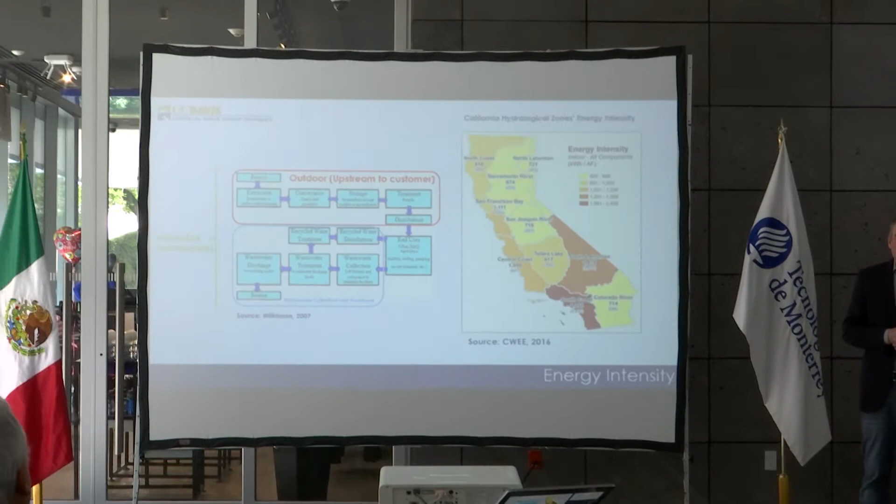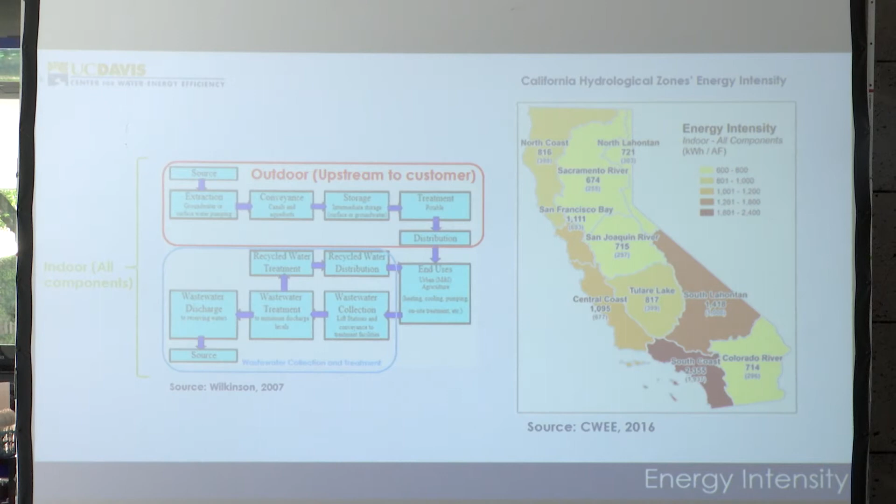So if at any point you have questions, feel free to raise your hand or just yell out. So I'm going to step through 4 projects today. It's more of an overview than diving deep into one project. So the first project I'd like to talk about is one we've been involved with for several years, looking at quantifying the amount of energy that's embedded within water. Once you understand that, you can begin to understand the energy savings through water conservation. So I'm going to develop that concept in the next few slides.

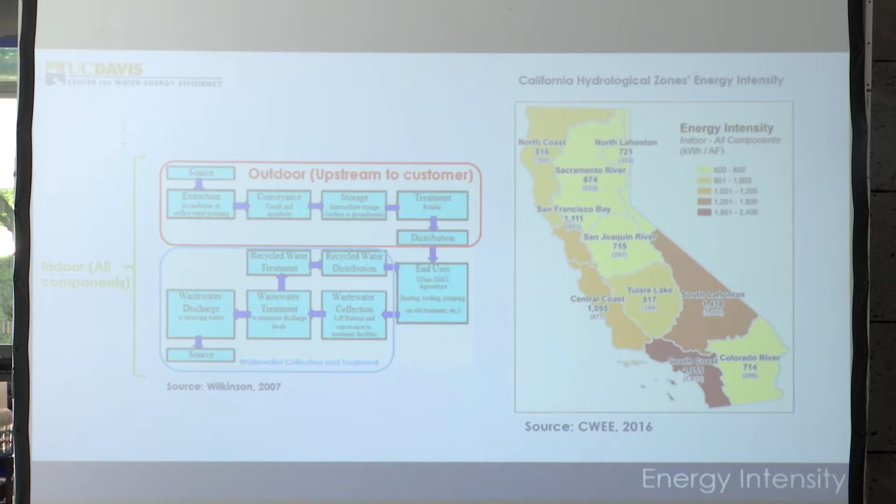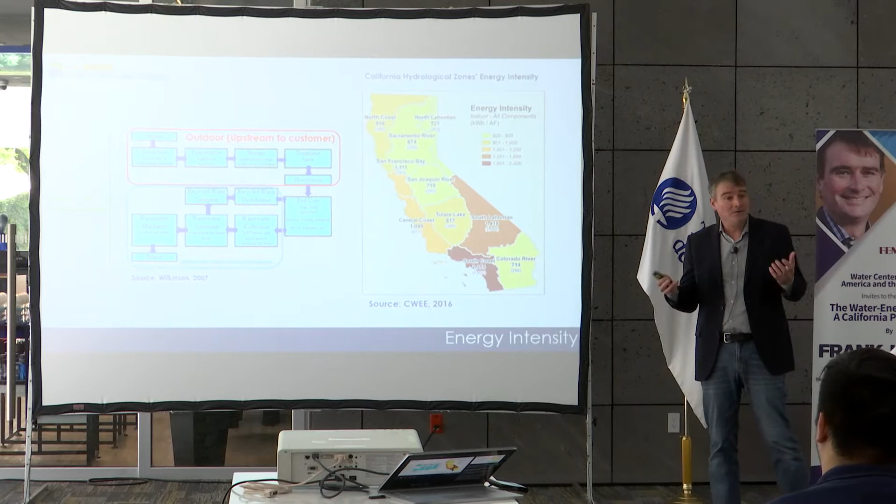Shown here on the left-hand panel are boxes representing the different elements associated with providing potable water or drinking water to an end user, like a house, apartment, or industry. The boxes shown going this way are the different elements associated with treating wastewater before it's discharged into the environment. Each one of these boxes has energy used as part of that process. If you add up all the energy in these boxes to represent the amount of energy embedded or associated with the water provided to the end user, you can begin to understand that if the end user saves water, they also save electricity or natural gas, and you can quantify how much they save.

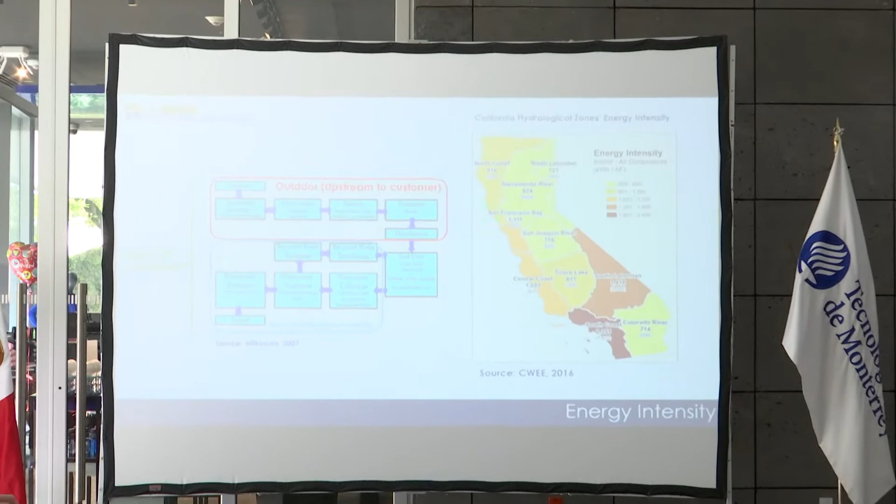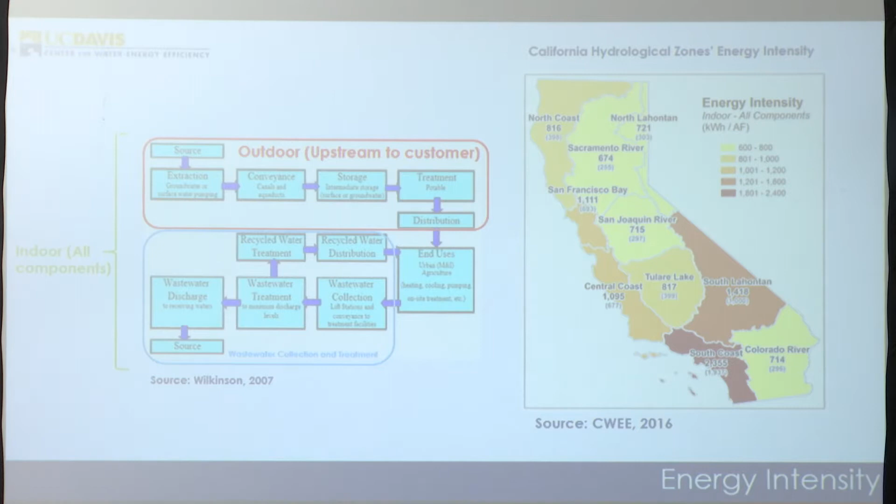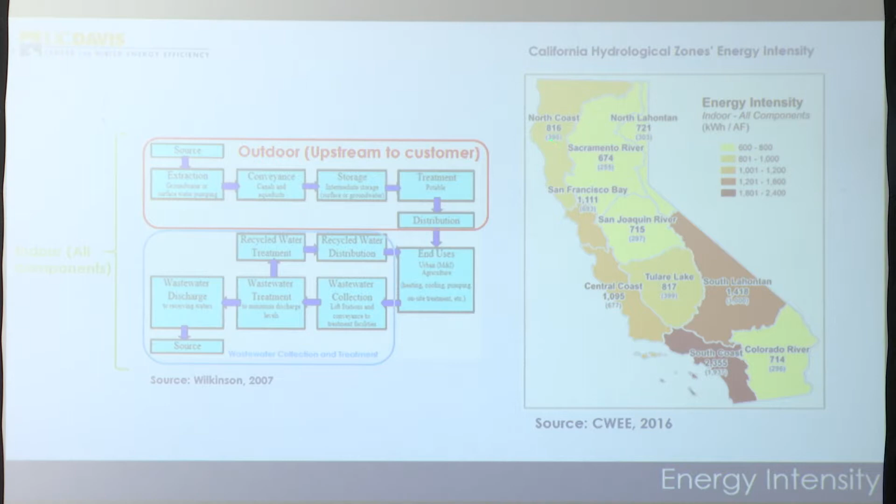There are two primary ways to calculate energy intensity, so I'm going to show you two ways now. The first way is, this is the state of California, and the first approach is to develop regional estimates. This right here is a region within California called the North Coast region. Someone went through about 5 years ago, and developed the energy intensity of that water. The value shown here in bold is the sum of the energy put in to make drinking water plus the energy put in to treat wastewater. The parenthetical value down here is the energy used just to make drinking water or potable water. So that's one way, and it's a static value.

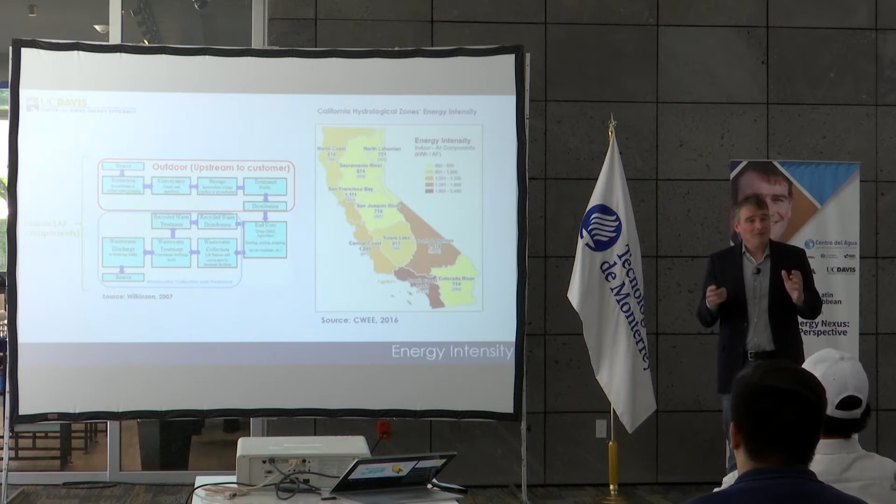It doesn't change with time, it's just a value. Then if you live within this particular region, in concept, if you roll out a program that replaces toilets and shower heads, you could figure out how much energy you save through saving water by replacing those fixtures within a house or residence.

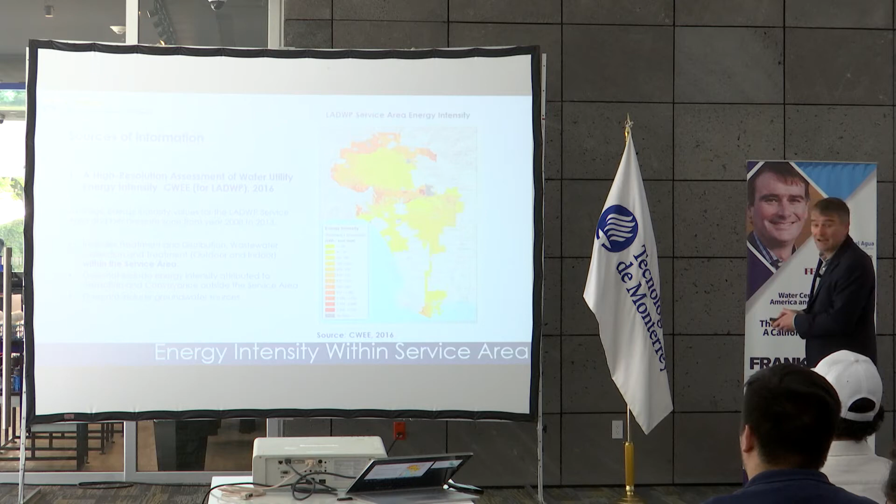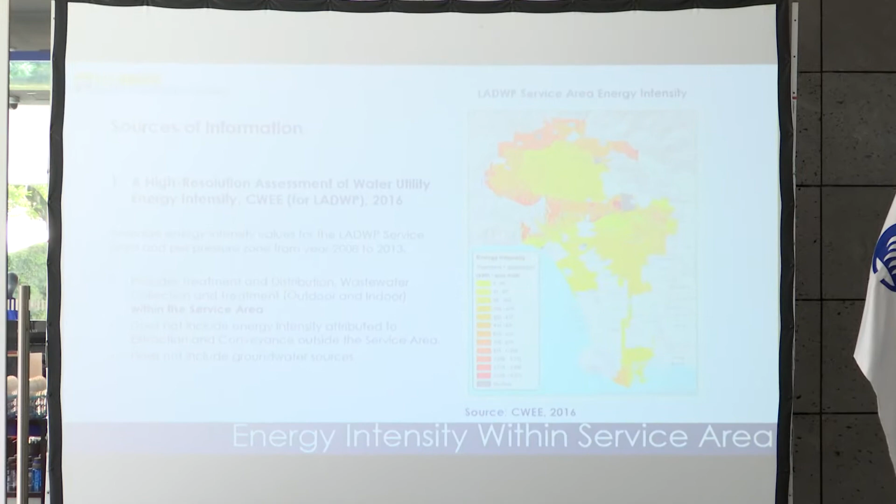Throughout these slides, don't worry too much about the text. I'm just going to say what the text says in words, so focus more on the images. The other way to do this is by going to the water utility itself or the wastewater utility and obtaining actual information from them.

Yellow is low and red is high. The takeaway message here is that within a water utility, there are certain areas that use a lot of electricity or natural gas, and areas that use very little to none. This is a much more accurate number than the regional estimates, and it can also change with time. You can update the numbers monthly, yearly, on whatever basis you'd like.

We also did a similar study with the wastewater system, which I'm not going to show you, but it produced a similar kind of graphic representing the energy associated with wastewater conveyance, treatment, and disposal.

The other element, so that's all within the utility. It'd be like the city of Monterrey, that would be all the energy within the city. There's also energy expended to get the water into the city, and this is generally associated with surface water. If you have to transport water long distances into your city, there's energy associated with that.

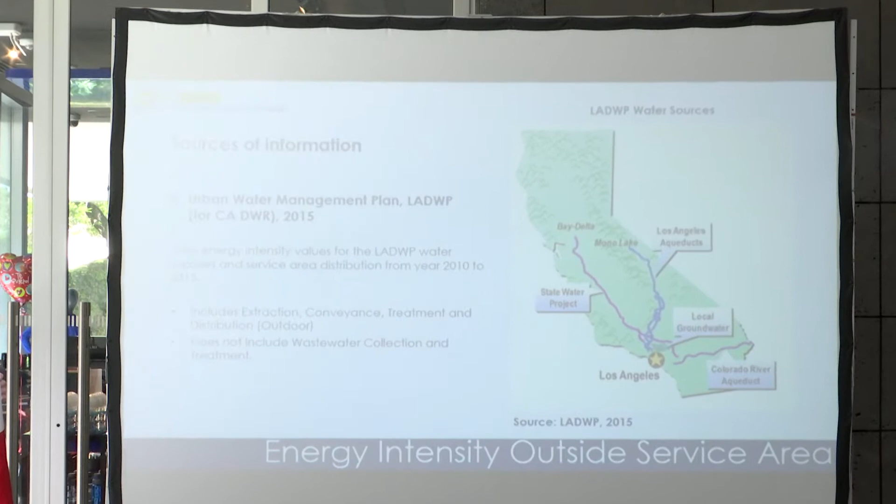Los Angeles also has some groundwater pumps that they pump locally, but they also get their water from three different sources: the State Water Project, the Los Angeles Aqueduct, and the Colorado River. We also incorporated the energy from these outside sources into our estimates of the energy intensity of the water system itself, which I just showed you in the previous slide.

What we did next, again, don't focus on the words, I'll describe this, just focus on the graphic. We now have basically six different estimates of energy intensity. This value is the energy intensity within the service territory of just their drinking water system. Here, the red is wastewater, the blue is water, same as before. This value is the energy intensity associated with just their service territory for both water and wastewater.

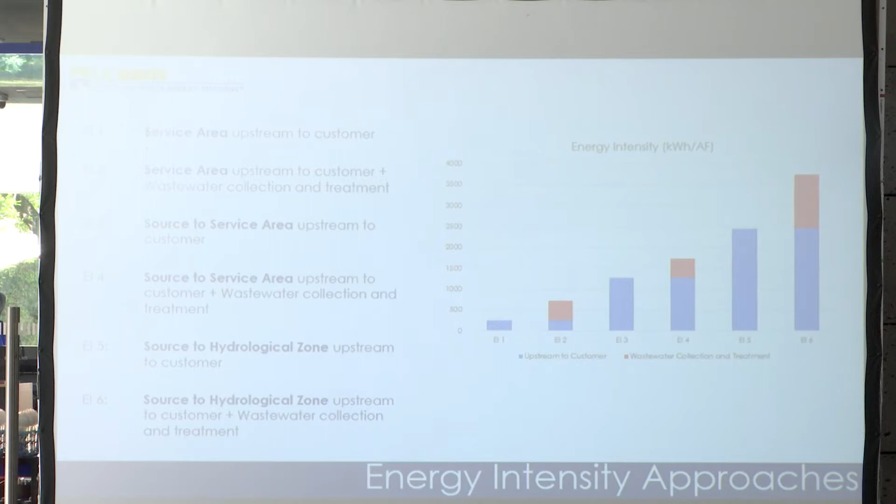This value here is the energy intensity of their potable water system, including the energy in their water utility, and then at a larger geographic scale, the energy expended to get water into their service territory. Same idea here for water and wastewater, and then these are the regional estimates that I showed you in the first slide.

What we did is we took these different numbers and used them to estimate the energy saved through the different water conservation programs that the Los Angeles Department of Water and Power has in place, and we compared them to their energy efficiency programs run from their energy group.

Shown in blue, these words here, again, the words themselves are not important. What's important to note is that the words corresponding to the blue bars are different types of water conservation programs that the Los Angeles Department of Water and Power has put into place over the years. As an example, this says high efficiency washers, this says high efficiency toilets.

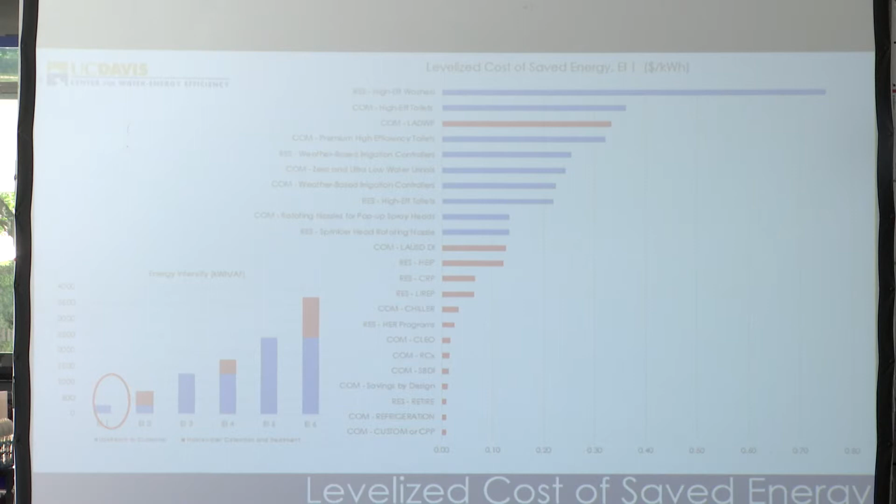All the words corresponding to the red bars are energy efficiency programs they put into place to save energy. Those programs include things like replacing incandescent light bulbs with LED light bulbs, or replacing low efficiency water heaters with high efficiency water heaters. They're programs that specifically targeted technologies that save energy, not water.

What we've done here is used the energy intensity estimates to translate the water saved through these different programs into the corresponding energy that was saved through saving water. All these bars are in reference to dollars per kilowatt hour. We're going to do this now six times, and as this happens, all these names will stay the same, but the bars will change.

So the first estimate of energy intensity we're using is just the energy intensity of the potable water system within Los Angeles Department of Water and Power service territory. And you end up with a plot like this.

So the cost to save a kilowatt hour through water programs is not very competitive to the cost associated with saving energy through energy efficiency programs. Compare the blue bars to the red bars - they're larger. So from a business standpoint, if you look at it just through this lens, it makes a lot more sense to spend energy efficiency money on energy efficiency programs, not water efficiency programs.

But now as you expand your lens and look at the second way to calculate energy intensity, the blue bars get smaller. I'll just click through this and you can watch it like an old-time movie. But as we expand the geographic scale, the blue bars shrink. And so as you expand the geographic scale, at some point investing energy efficiency money into the water sector to save water becomes a very cost-effective way of saving electricity.

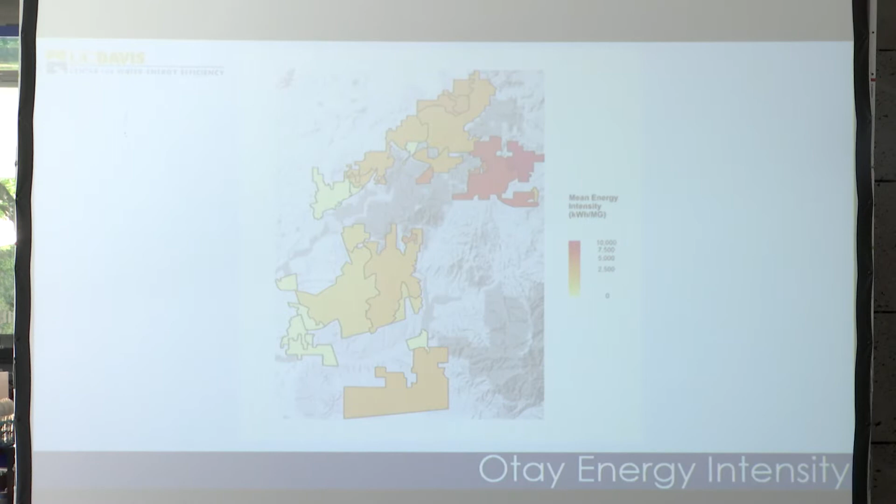Now these colors correspond to the energy intensity for different regions within the city of Otay. It's a very similar graphic to the one I showed you for Los Angeles Department of Water and Power. The city of Otay was interested in rolling out a rebate program, which I'll talk about in a second.

So the idea here is: historically, if Otay wanted to roll out a water conservation program, they would pay the full amount for it. But the idea we're trying to develop is that there are multiple stakeholders - 3 energy utilities and 4 water utilities - all of whom benefit from saving water down in Otay.

But there is a way to estimate this fairly accurately. This is an equation we developed, it's existed for a while, it's called the efficiency lift method. You can estimate the amount of water withdrawn from the ground with four inputs: the energy use of the pump, the efficiency of the pump, a conversion factor, and the total dynamic head associated with the pump.

This is the same equation, it just breaks down total dynamic head into its components: the depth from the ground surface to groundwater, the drawdown of the well—once the well starts to pump, it tends to create a cone of depression—and any additional pressure or frictional losses as the water leaves the ground and goes through the pipes out to where it ultimately gets deposited.

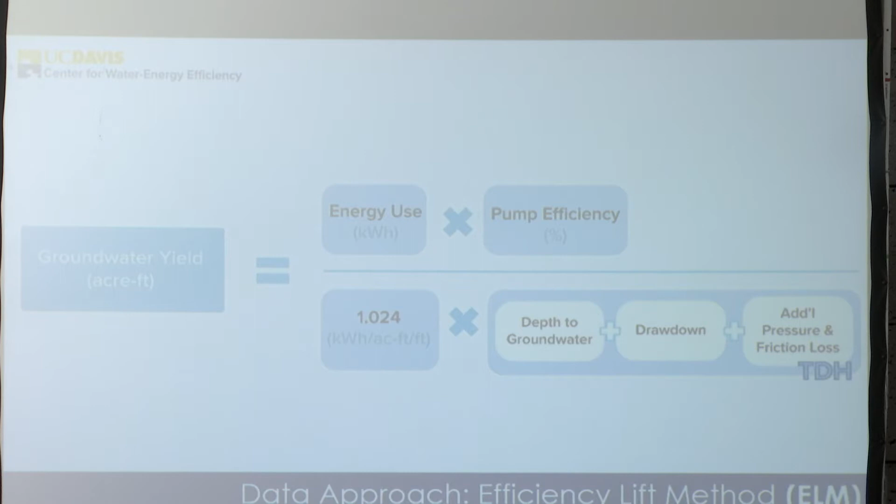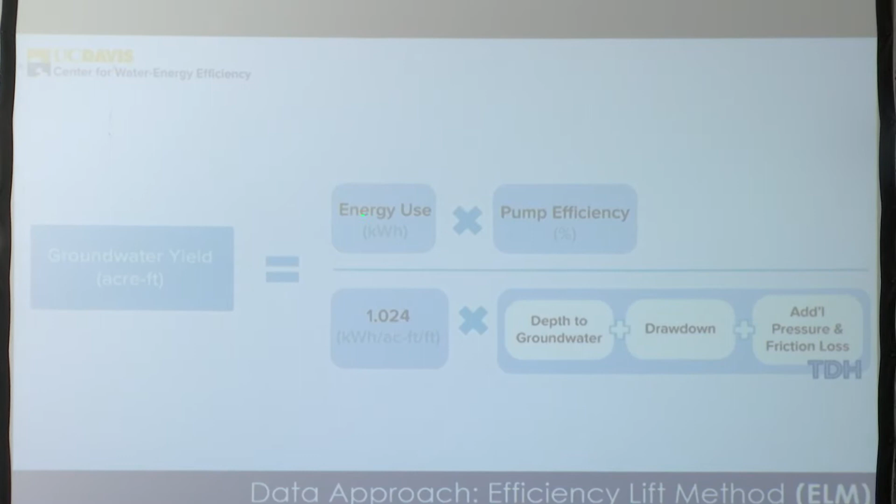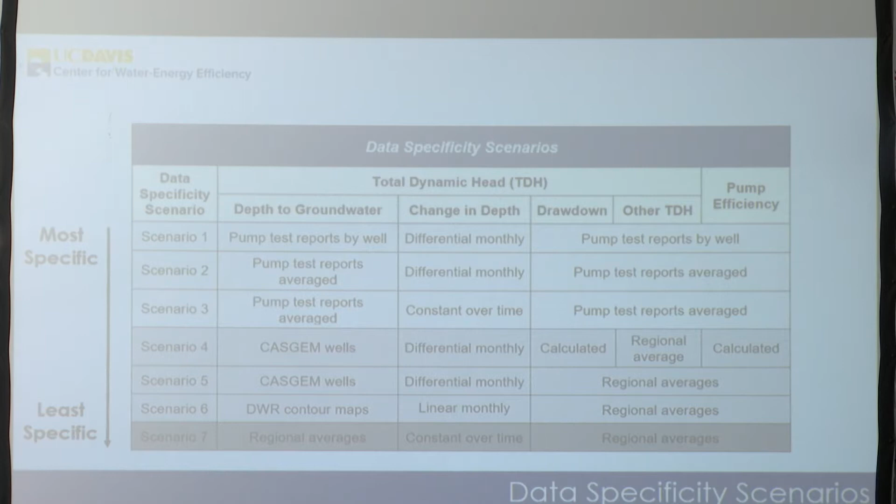This was a very long and detailed study, but we used this method with a variety of data sources to obtain these numbers. We ran a series of 7 scenarios, and these are all the sources of data we used. We had a lot of different sources and we mixed and matched them to create 7 scenarios.

We worked in a region in California where they had flow meters on the agricultural pumps, which is very uncommon. So we had an actual estimate of water flow, and then a predicted estimate using electricity data and the efficiency lift method. We wanted to compare the two to see how accurate they were.

We compared them on two bases. One was looking at how accurate they were on a monthly basis—monthly estimates of all the inputs that go into the efficiency lift method versus the estimate of water flow. How closely did those compare?

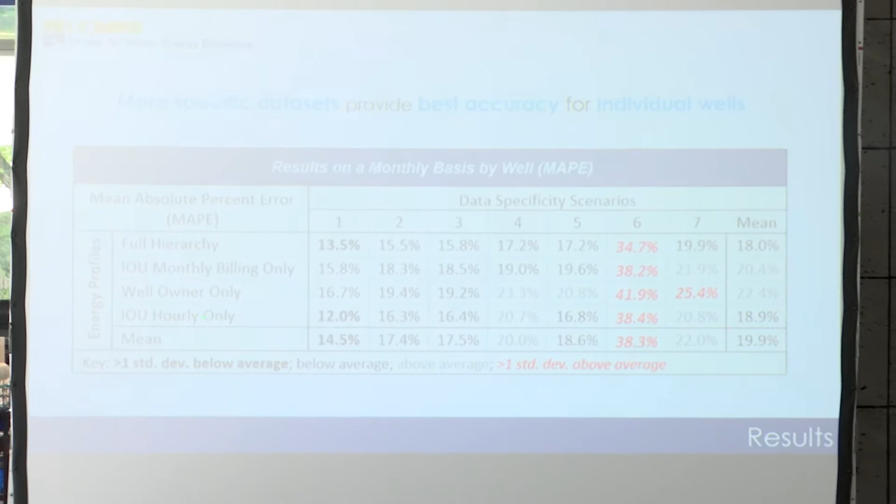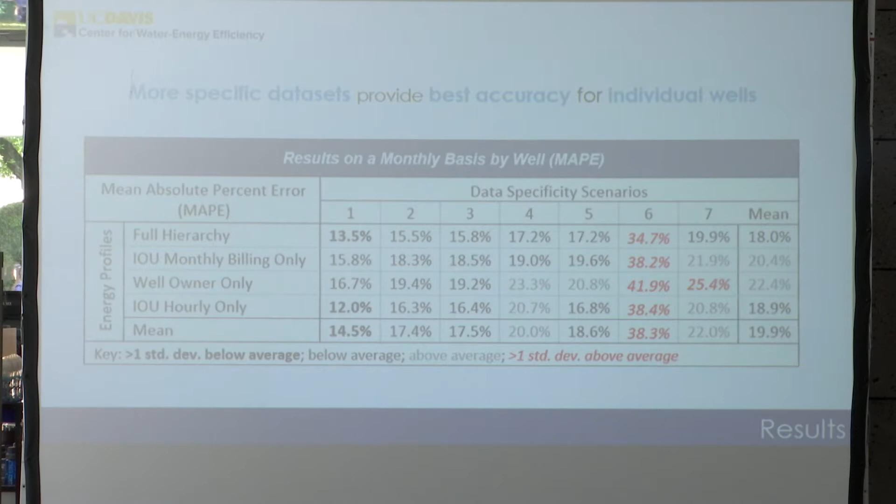There's a lot of information here, but the main thing to focus on is this IOU hourly data. This energy data came from the energy utility itself. We have the ability in California, through different laws and policies, where people like me can go and request energy bills from the utility without the customer's permission. There are a lot of restrictions placed on me in terms of what I can do with that. So we obtained the energy bills from the energy provider, put in the estimates of the other parameters, and calculated how well this method compares.

You can see there's quite a range here. This one is the best, at 12%. And 12% might sound like a lot, but when your basis of comparison is no data versus data that gets you within 12%, that's not a bad estimate.

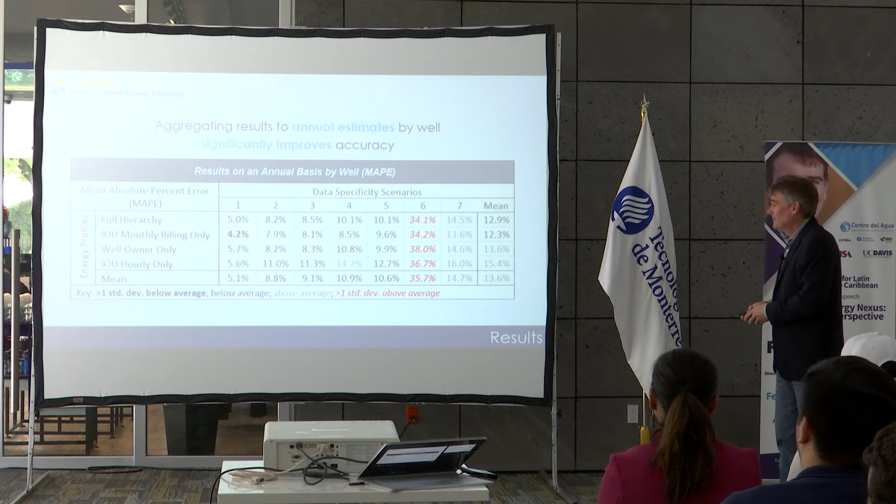Then we looked at it another way: take all these numbers and average them together into an annual average. We looked at the data the same way—again, just focus on this one. As you look across here, the errors associated with this method versus the actual data begin to lessen, because you're averaging a lot of the errors together associated with the two methods.

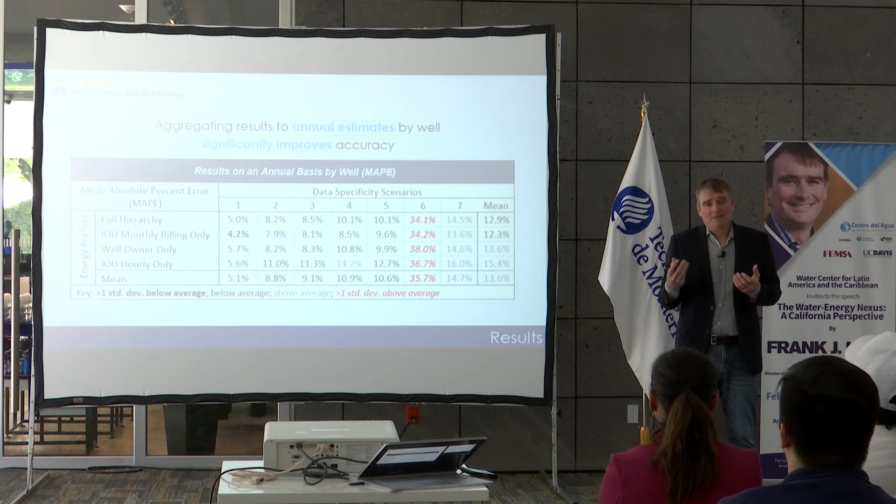A method that estimates groundwater extraction within 5% is a very good method. So we're now planning to use this method to integrate into groundwater models in California, to begin making estimates of how much groundwater is withdrawn. Through that process, we'll begin land use planning of what needs to happen on top of the aquifer to ensure it's not overdrafted over a long period of time.

Land use planning means you can have agriculture, industry, or commercial, but what mix of those should you have over that aquifer to ensure the aquifer will be present in your children's lifetime. This is another concept we'd like to explore and bring down to Mexico in the Monterrey area.

Remember the four areas I wanted to highlight. The third area is opportunities for water and energy efficiency in agriculture. There's quite a diversity of water and energy use efficiency in California, and from what I gather, quite a diversity down in Mexico as well.

The basic idea is if you can obtain actionable intelligence on what different growers or farmers are doing, you can help the ones that are not very efficient become more efficient, and the ones that are very efficient you can help promote and advertise as being really good stewards of the environment.

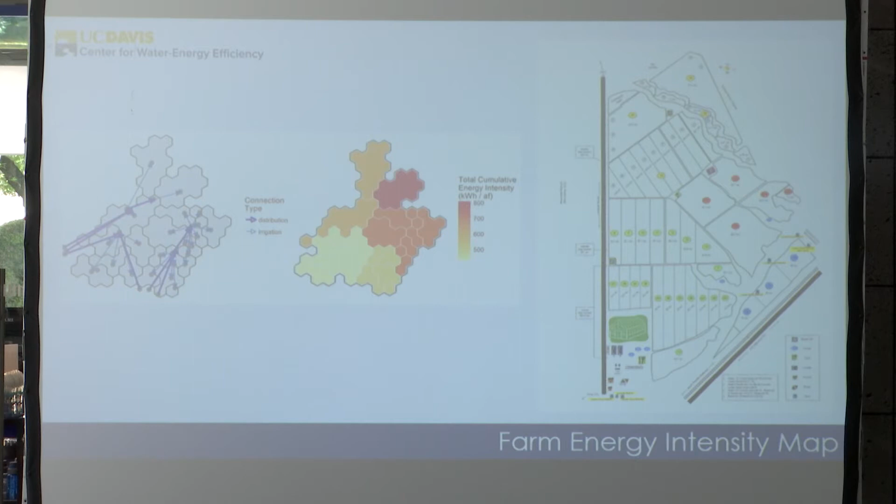Shown here is a graphical representation: berry grower, berry grower, berry grower, berry grower, and berry grower—so there's 5 berry growers. These numbers represent low energy intensity.

Energy intensity is how much energy is used to produce an acre foot or a certain volume of water. Yellow's low, red's high. If you compare these 5, you can see there's diversity across different berry growers, and that diversity of energy use might be warranted, but it might not be.

So this at least gives you a tool to go in and say, well, this berry grower and this berry grower might need some help to make their pumps more efficient or to make their operations more energy efficient. The idea is you can identify those growers, understand what they're doing, and then if they need help, formulate plans for what they need to do to make their growing operations more energy efficient.

Shown here is row crop and row crop—there's 2 row crops, but again you can see some diversity in how energy is used within row cropping or irrigation of row crops. And then we have 2 wineries down here, and again there's quite a bit of variation there.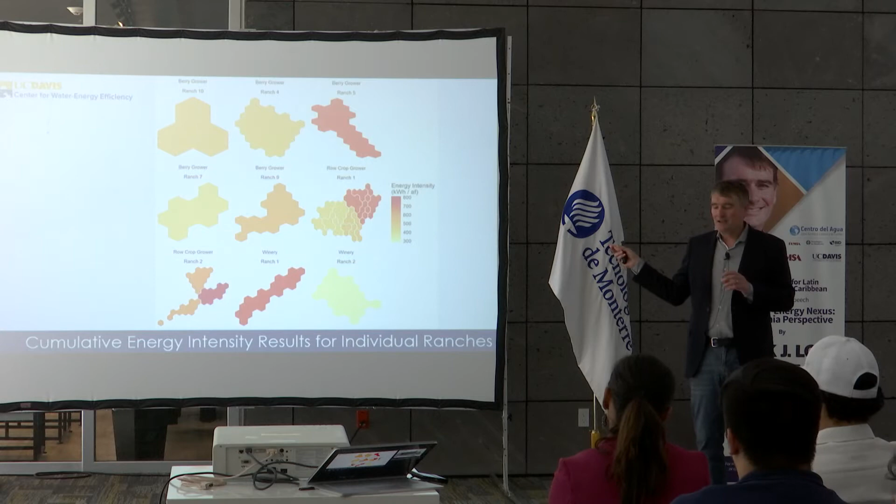I don't have a slide just for the sake of time, but remember that energy is linked to water, so we could translate this very easily into water use. We'd end up with the same types of plots, and we can use that to interact with growers and farmers to understand how they're using water and what practices they might adopt to make their water use more efficient.

That's another project we're working on, and we hope to bring that down here, ideally marrying it with the groundwater modeling piece. So now that you can estimate how much water is withdrawn from the ground, you can get a sense of what's taking place on the land. You can then go in and help people become better stewards of water and energy who need help, and promote the ones doing well as good examples for others to follow.

The final piece to end with—and this is a little longer, but I thought it might be more interesting for all of you as college students—is the final project we've been working on related to this area: trying to take these concepts I've described and downscale them to a residential house.

Some people like to use the words on-site or decentralized, but it's like, can we take these concepts that we apply to communities or regions, and extend them down to a much smaller scale—basically the scale at which you and I live?

This project was actually a 2-year project, a student competition sponsored by the U.S. Department of Energy called the Solar Decathlon. In the Solar Decathlon, I have a series of slides to show you, but students design, build, and then operate a zero net energy residential house, going through all the steps of doing that.

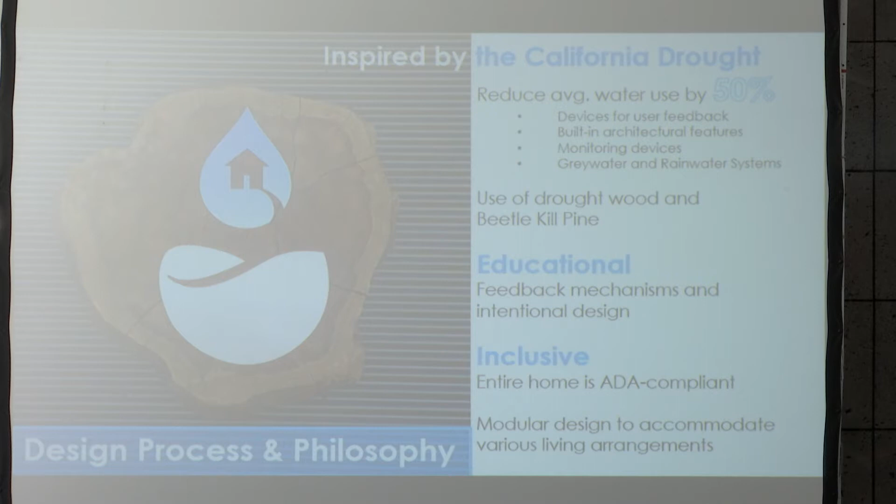In addition to the competition goal of designing a zero net energy house, students could also decide on other elements they wanted to add. This student team was very interested in designing a house that had very little water use. Their goal was to reduce the water use of this house by half of what a normal house in California would use. I'll talk about how they did that here in a minute.

They also were very interested in having the house be educational, so that as you tour the house, or as you live in it, it will teach you something about what you're doing and how to become better at it. I gave you an example of farmers and how we can identify growers that have high energy or water use. They wanted to take this idea and bring it into the house, having it teach the occupants how to be better stewards of energy and water. I'll show you some ways they did that.

The final thing is they wanted the house to be inclusive, and they defined that in two ways. They wanted it to be ADA compliant—ADA standing for the Americans with Disabilities Act—so they wanted it accessible to people with disabilities. They also wanted the house to be modular. I'll show you pictures here in a minute, but the idea of modular is the house was small, about 930 square feet, and they wanted it to be modular so you could reprogram it—your kitchen can turn into a dance room, or your living room can turn into a dining room. So while it's a small house, it can have the functionality of a much bigger house. They weren't able to fit a bowling alley into it, but they got a lot of other functionality into the house.

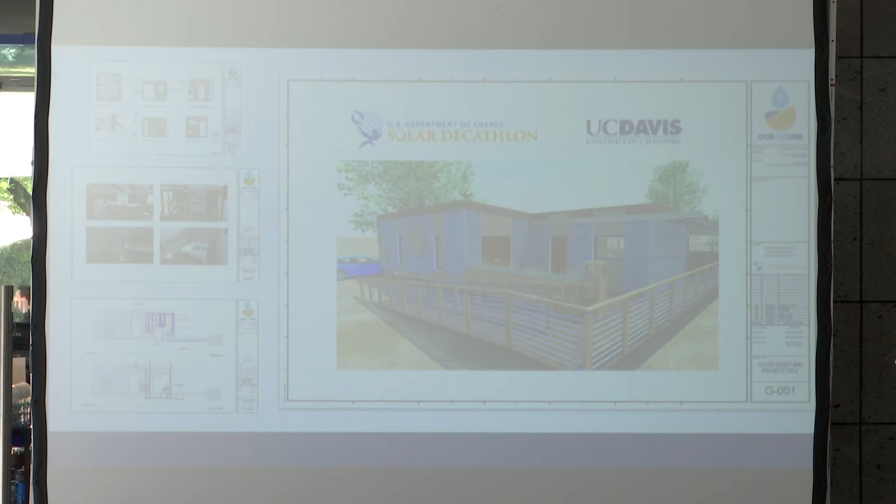The students took the house from conceptual design to design development, and then ultimately worked out detailed design, producing a set of plans and specifications that, in concept, you could hand off to a contractor to build. But instead of handing it off to a contractor, the students moved from the classroom out into the field and began the construction process.

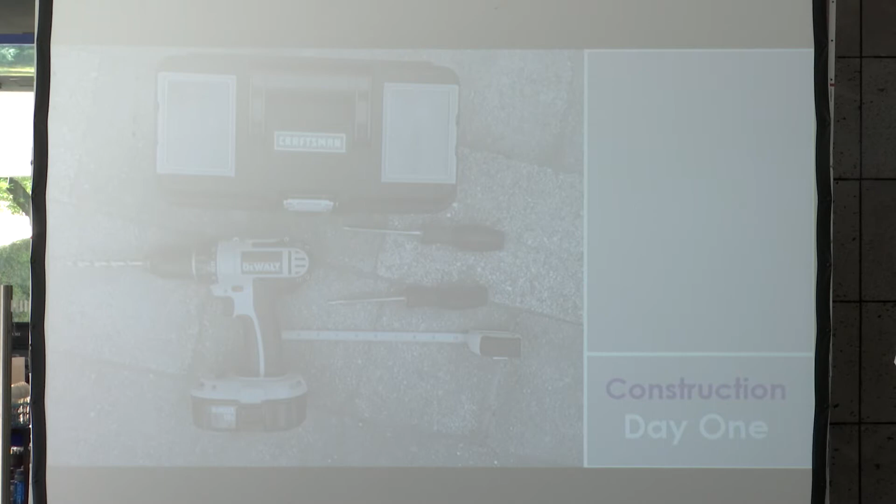I don't want to speak for all of you, but I will speak for the students that participated on this project: when you move into the field and say, okay, here's a hammer, a drill, and a tape measure, the vast majority of students would ask questions like, how do you read a tape measure? How do you use a drill? It's actually—and I don't say that to be critical of them—part of the educational process that you never think about in the classroom.

I'm assuming most of you are in some kind of design profession. You all learn how to design, but many of you don't—or at least, speaking from my university—we don't teach students how to actually build the thing they design. And I contend you have to understand how to build in order to be a better designer. We don't have this built into our curriculum, so this was the only opportunity students had to learn these skills.

So I just have some photos of the construction process happening. The house, because it had to be transported, was built on two very large trailers. I want to emphasize they're not modular or mobile homes. They were actual houses built to housing standards. The intent is, once they ended up in their final resting place, they would be slid off the trailers and put on a fixed foundation. But here you're going to see them on trailers.

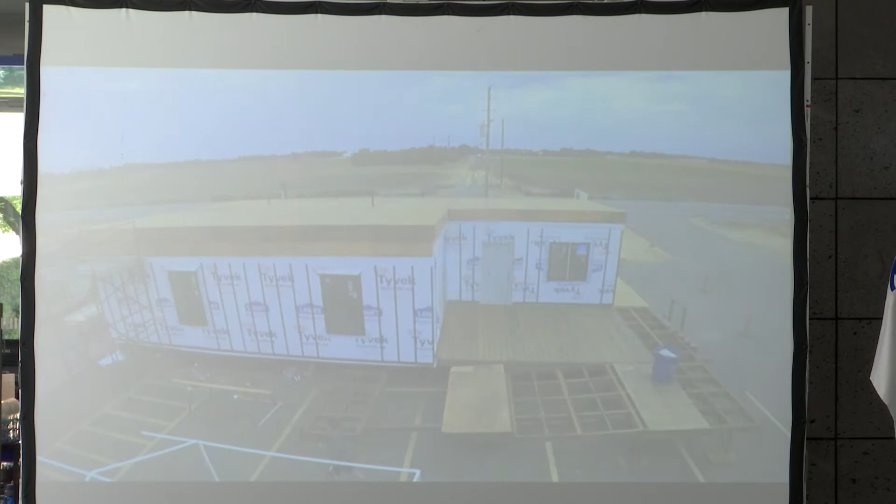So now this construction process took about a year and involved about 150 students, not all of whom are working at once, but they would come and go. This was all offered as part of a 3-course sequence teaching students how to build something.

So you'll notice now that solar panels are up on the top of the roof. There's a white roof that's part of the energy efficiency measures that were put into the house. White roofs help reflect the heat so it doesn't go into the house. There's a couple other energy efficiency measures I'll talk about.

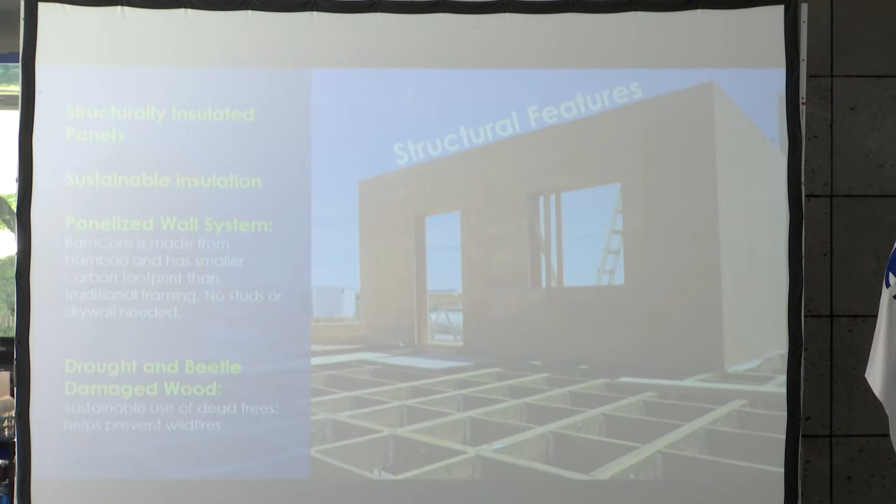Are there any structural engineers in the room? No? Okay. You have one? Maybe? So just to run through some of the features.

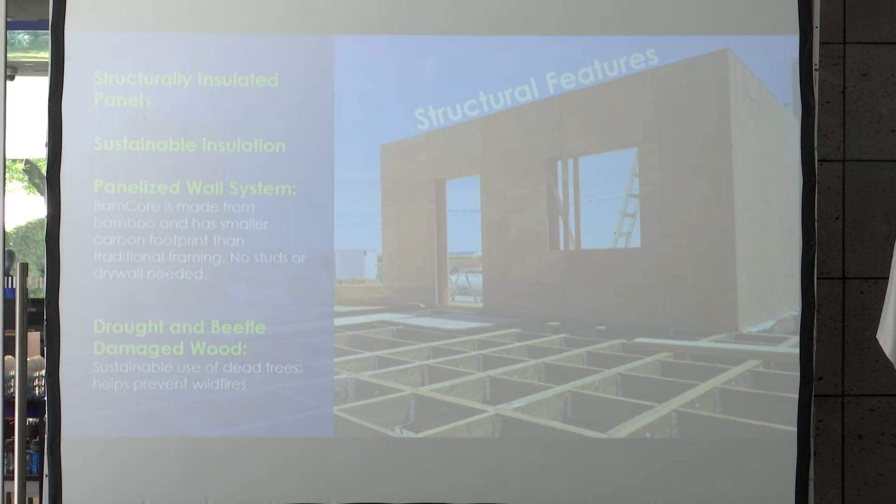So the structural elements, I think the main point here is these are panels. The students didn't build these. They're panels that you erect—built somewhere else and then you put them up. It's a very easy process for unskilled labor to use in order to build something, because you basically just erect things and put them together.

This is made out of bamboo, which in California is considered a sustainable material. You'll notice a big gap between the walls—this is the exterior and this is the interior. That gap at some point was filled with insulation that has a very high R value, so it doesn't allow a lot of heat to leave the house.

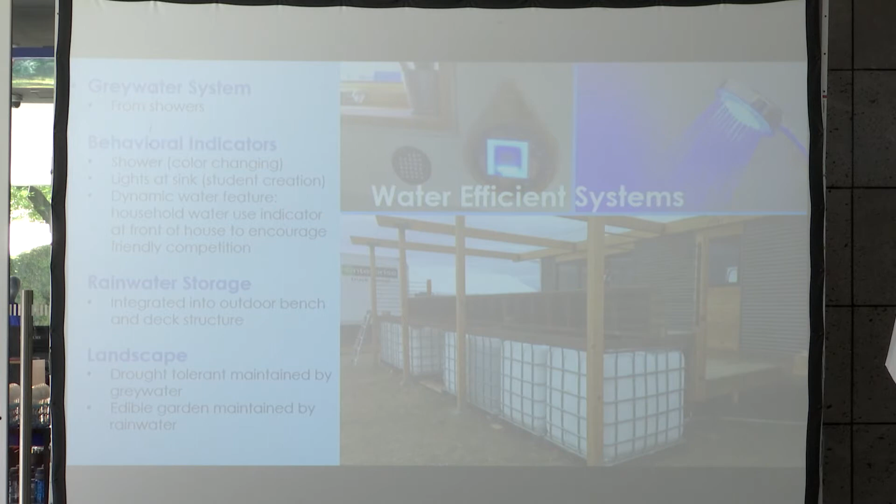One of the neatest things I thought they came up with was this idea of being educational. They had behavioral indicators that taught the residents of the house whether or not they're using appropriate amounts of water. So they found a shower head—it doesn't make the water blue, but it makes the water look blue with light. The water goes from blue to yellow to red, and when it gets to red, it means it's time for you to get out of the shower.

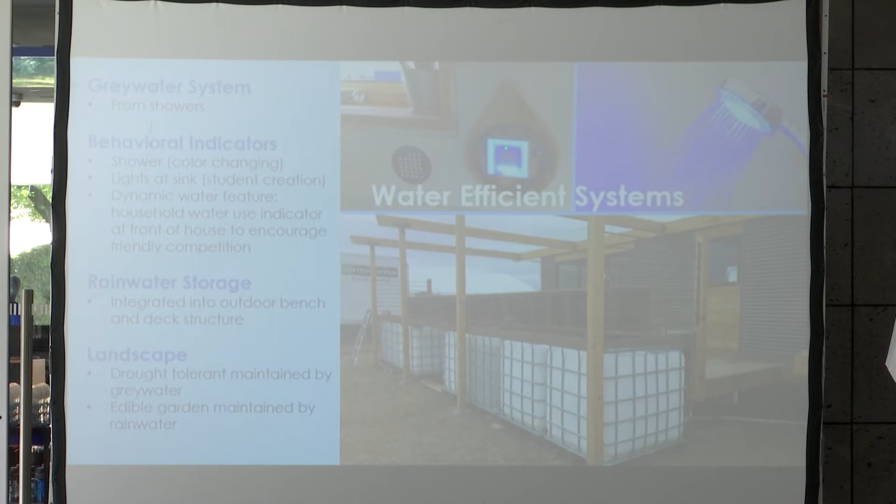They also created, and actually built this themselves, a display made of a series of LED lights—here's a few lit up. Every day when you start your day, you come out, and these lights were where there was a faucet, one in the bathroom and one in the kitchen. Every day when you start your day, the screen is full of lights, and that's your water budget for that sink—the amount of water you can use. As you start using water, the lights go away, and when all the lights go away, the budget for that sink is done for the day. It doesn't mean the water shuts off—it's just teaching you the appropriate way to use water within the house. They had a couple other educational features, but those are two I wanted to highlight.

And then finally, I thought this was really neat too, this idea of landscape and what they did. This brought in people from landscape architecture, but they landscaped the entire house with plants that used the same amount of water annually as what was produced with gray water. So they essentially eliminated the need to irrigate your outdoor landscape with potable water, but you could still have a very nice, lush landscape. Your yard doesn't look like cactus and rocks, but effectively you don't have to use any potable water to irrigate it. So it eliminates all outdoor landscaping water.

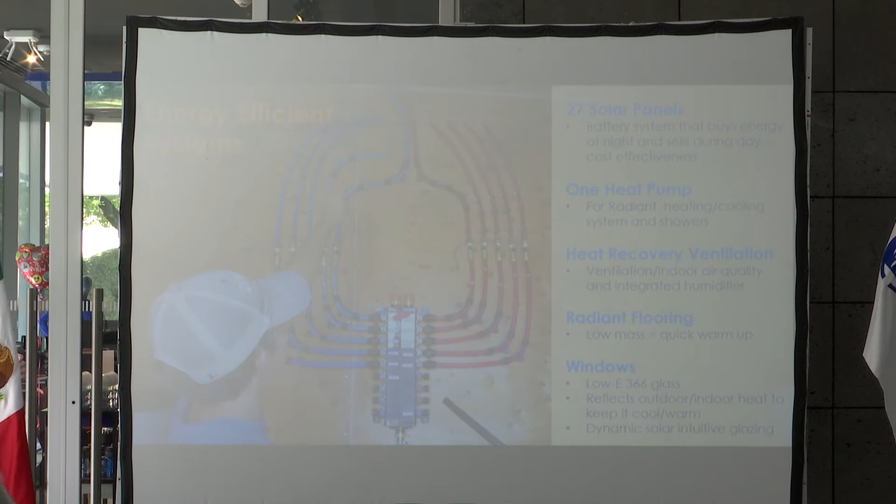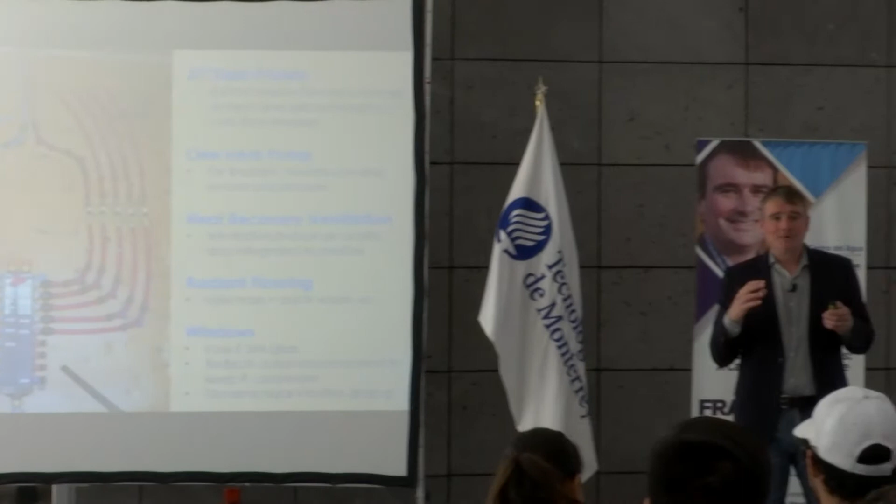Energy efficiency, I'll run through this quick. The house had 27 solar panels which generated enough electricity to power the house. We put in a battery so that not only could we generate electricity, but we could manage when we pulled electricity from the grid versus the battery, managing the time of use. So it was grid tied, and it's zero net energy, meaning over the course of a year it uses zero energy, but sometimes it pulls from the grid and sometimes it doesn't. The battery helped manage that.

We had an efficient heating and cooling system, a radiant floor system. You put a bunch of pipes in the floor, run hot or cold water through them, and that radiates up and makes your house hot or cold. We also had really good insulation and really good windows.

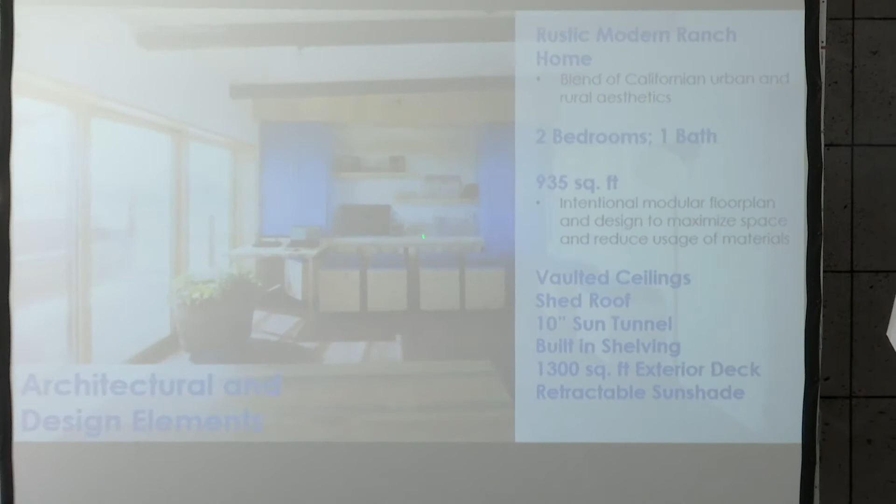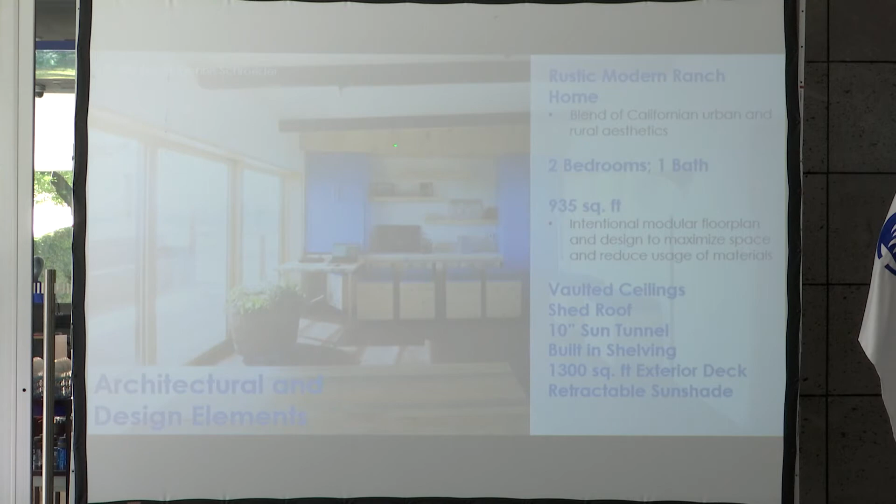So these are just some photos of the house. This is the living room, and you'll get a sense as I click through. It was a small house, 935 square feet, probably about the size of this room right here, excluding the back part. It had 2 bedrooms, 1 bath, and the designers decided to give it a rustic, modern feel. You can see the rustic wood, and the modern open air, paint, and vaulted ceilings.

So this is inside the house, looking from the living room into the kitchen. The students actually used the house during the competition, so they cook in it. They don't live in it, but they cook in it, drive electric cars, charge the electric cars, things like that. This is the kitchen and the living room.

To get a sense of the modularity, this is a table. You can fold it down like these are, or fold these up, so you can have a big table. This is kind of a table on wheels you can use as part of your kitchen area, or move out and turn into a dining room table. Under here are seats you can roll around, with storage areas built in. So these are all the elements they put in to create the modularity, so you can have a big dinner party, then put your table back down and let kids play in the living room. There are places to store things.

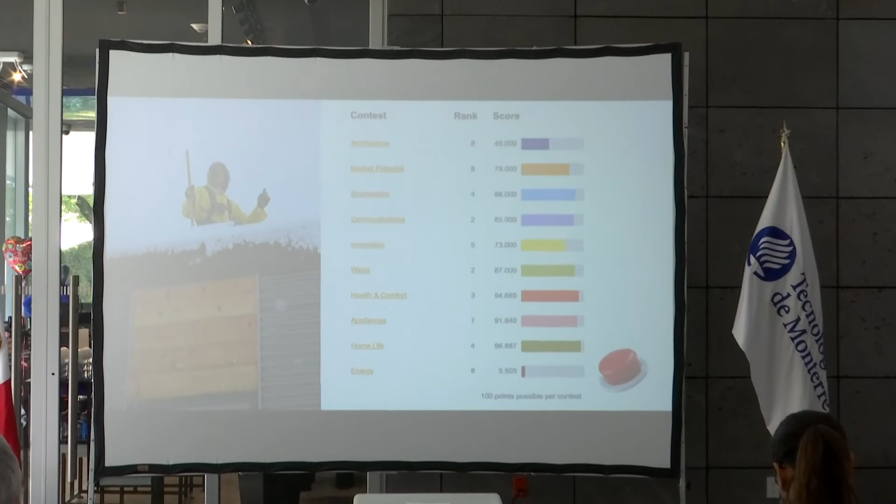So this is how we did. The Solar Decathlon has 10 different competitions: architecture, market potential, engineering, communications, and so on. This is how we scored in each of these different competitions. You'll notice that this one right down here, we scored really low in. We would have done really well, except we scored really poorly here. And I put the big red button.

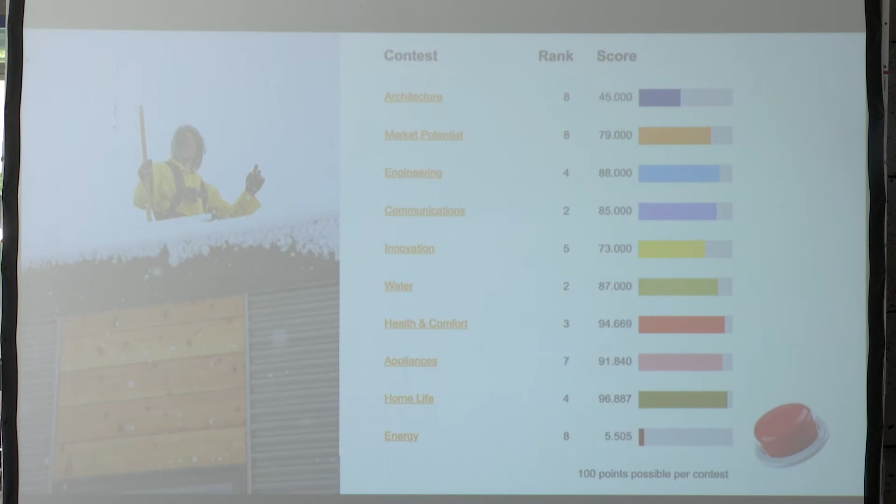Just as an aside, I thought it was funny. We got the house to the site, and the local building inspector said because we have a battery in the house, we need a big red button you can push to disconnect the battery in case of fire. That makes sense - if firefighters cut through your roof to put out a fire, they want to make sure there's no electricity. They can kill the power with the electrical panel, but you can't kill the battery, so they wanted a big red button.

We didn't have a big red button, so we had one installed locally, and they didn't install it right, so they destroyed our whole electrical system. Essentially all our solar panels and battery and everything else didn't work. If that hadn't happened, we would have done a lot better.

But these are all the teams that showed up. This is our team, and this is how we scored - we didn't place very well. But you'll notice, if the energy competition, if we had actually done how we thought, we would have scored pretty well - we would have come in the top 3. So it's the big red button's fault.

Just as a final example, this is the house that won. It was designed by a team from Switzerland, and this is their team. They had really neat uniforms that they wore all the time, unlike any other team. They were very organized. This is literally their house, the inside. You'll notice something strikingly different right away, which is it's 2 stories.

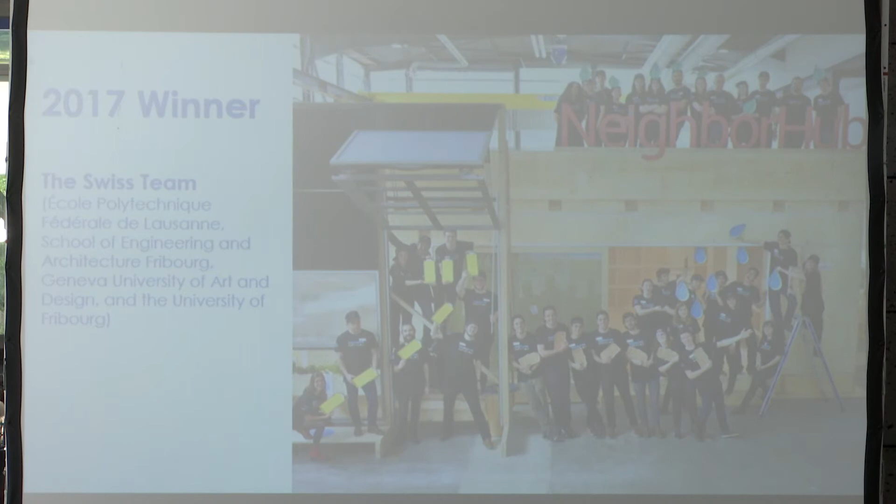Remember, they designed and built this house in Switzerland, deconstructed it, put it in shipping containers, shipped it all the way over to the United States, trucked it to Denver, Colorado, then took it out of the shipping containers with cranes and built it. So it's a very different building style than what we did - we just put ours on a trailer and drove it there. But this is their house.

I'm just going to show you some photos. They had an aquaponics system underneath that treated their gray water with fish. They were growing plants in it. There's a lot of things here I'm not showing you, but it was a phenomenal house.

But it's also, at least from my view, about what students can do with the money you can generate. Our students didn't have that skill set to create something like this, but we still created something really unique. The amount of money we could generate was a lot, but not enough to create something like this.

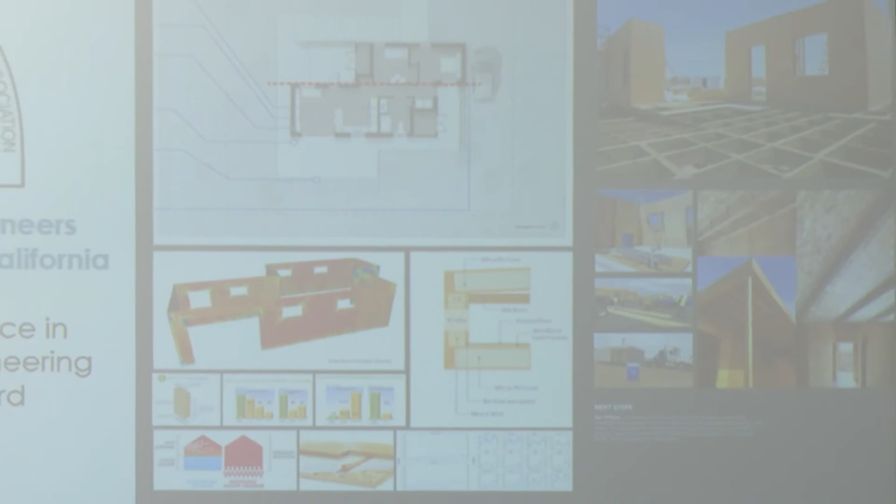I think the thing I was most proud about with this effort was after the competition was over, about 6 months later, we got nominated and won an excellence in structural engineering award from the Structural Engineers Association of California - the trade organization for our state, for all structural engineers - and they recognized this house as being very unique and innovative as it relates to structural engineering.

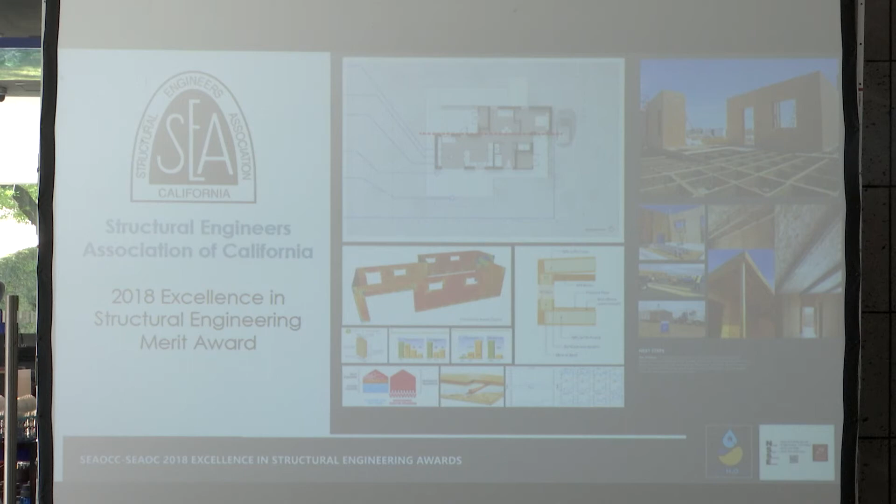So it's a real outside testament of how well these students did to win a statewide competition that's not related to students - it's all about working professionals. They competed against high-rise buildings in Los Angeles, redesigns of libraries in San Francisco, and they came out and won that competition. I was very, very proud of them.

So that's it, I'll end there. I'd be happy to follow up with any of you. I look forward to coming back down and spending more time in Monterrey and interacting with students as well as research. Thank you all for coming today, and thank you for listening.